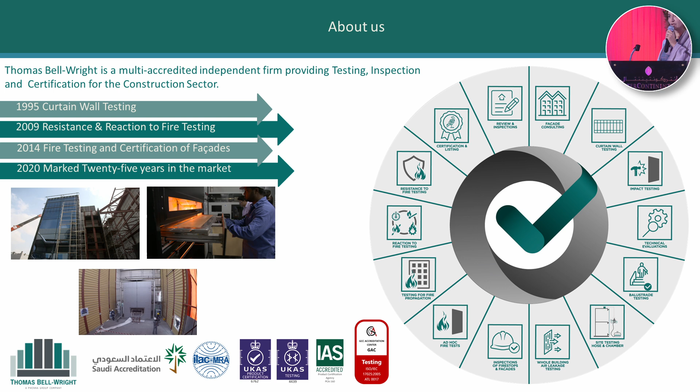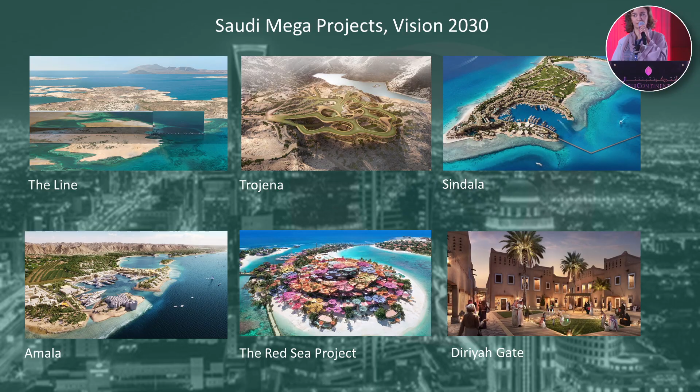As companies working in testing, inspection, and certification, we are required to have credentials to practice this work here in the Saudi market. So our laboratory is accredited by GAC here in the Kingdom of Saudi Arabia, and we are also accredited by the Saudi Accreditation Center for Inspection. Certification bodies are approved by SASO, and we have our approval as well for certifying materials.

We are now operating in very special and exciting times with the Saudi mega projects already starting and the construction boom to achieve the very ambitious vision of 2030. In order to prepare for this vision, the Kingdom of Saudi Arabia has taken many steps to establish strategies, regulations, and codes to achieve this.

If we have a background about codes and look up the oldest building code in the world, we will find that it was generated not far away from here in Iraq during the 18th century BC and the reign of Hammurabi. Hammurabi's reign was like an eye for an eye, al-ain bil-ain. I'm just going to read one line of the code for the audience.

If a builder builds a house for someone and does not construct it properly, and the house falls and kills its owner, then the builder shall be put to death. So basically what this says in very basic language is that the person who builds a house should be qualified to build it, and if it's not done properly, there should be accountability.

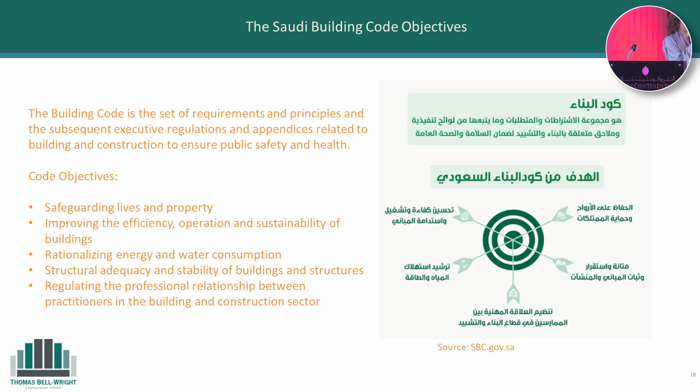The objectives of the code: the first objective is safeguarding lives and property, improving the efficiency, operation, and sustainability of buildings, rationalizing energy and water consumption, structural adequacy and stability of buildings and structures, and regulating the professional relationship between practitioners in the building and construction sector.

As we said earlier in the panel discussion, the code is quite large. It is comprehensive and spreads across many disciplines. It is hard for one person to be an expert in all these parts, and the consultant has to achieve many things at the same time.

So it's advisable to talk to the experts, to a fire and life safety consultant, to advise you on the best way to achieve everything related to energy consumption, green building code, and at the same time, apply the codes related to fire safety, which are 201 and 801.

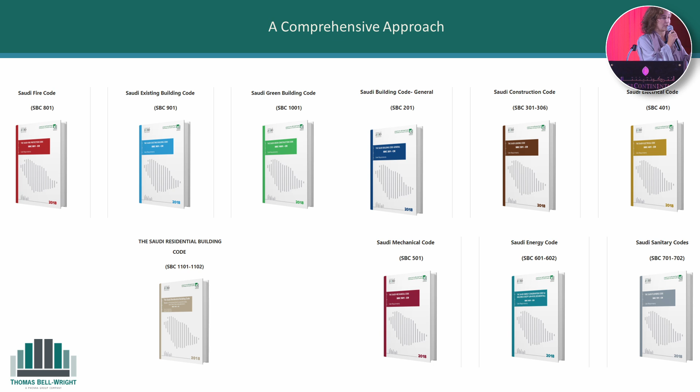After announcing the code to be the reference code for buildings, there was a 5-year implementation period. But still, during this period, from the beginning, fire safety and energy conservation were prioritized to be implemented regardless of this implementation plan. I'll just read in Arabic for reference to everybody.

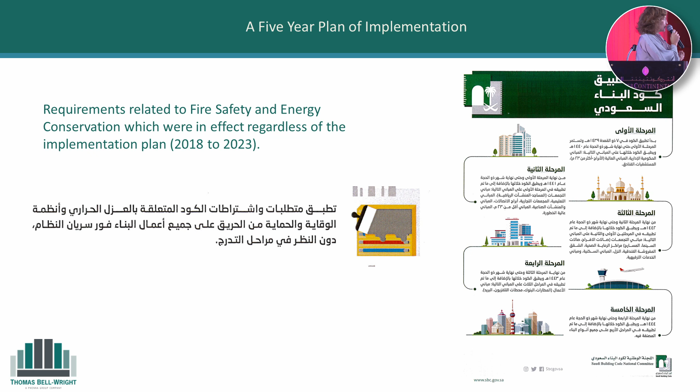This shows that fire safety and energy consumption are prioritized.

We had a bit of discussion earlier about the construction process: how the owner wants to build a project for a certain intent, maybe to sell it out or to keep it as his headquarters. He will go to a consultant and ask him to design the project as per the code. The consultant will then put together a set of documents, which are the specification and the tender package, and issue this project for tender.

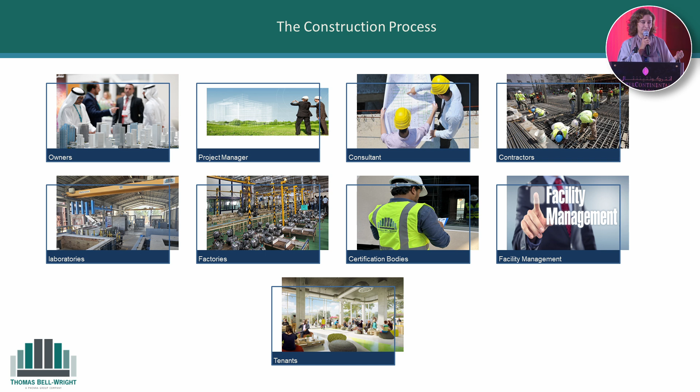A contractor comes and offers to build this project for a certain amount of money with the materials, assemblies, and structures that make the project, taking into consideration that all these materials should be sourced as compliant to the code.

Materials are fabricated in factories; they should be tested, they should be certified by a certification body, and then at the end we should deliver a project that is safe for the tenants and end users.

So this is the compliance path that I'm proposing for achieving this. The first thing is, during the design stage, is to have enough time to look at all the aspects of the building code and specify the right material from the beginning, because this will be the benchmark followed throughout the construction process by all the other stakeholders.

Testing and certification of materials that are the building blocks of this project should be established clearly in the specifications, and the requirements should be clear to safeguard the construction process and make sure these materials are compliant. During the material approval stage, the consultant should be diligent enough to look into the details of these materials, make sure they are the same as the construction project specification, and then inspect to ensure that what is installed is the same as what was approved.

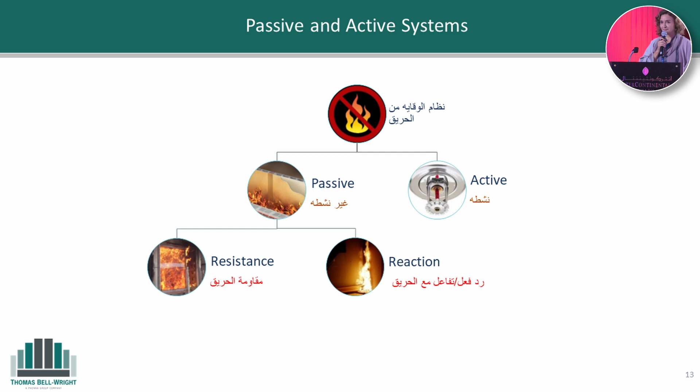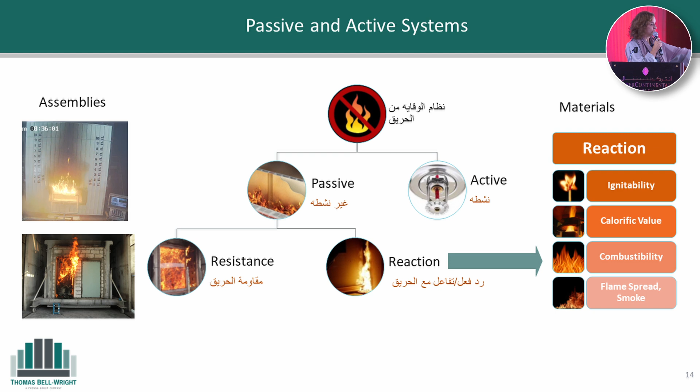In addition to this, you will have other requirements for assemblies, such as exterior walls, doors, or walls, as an assembly, for how they resist fire and reduce its spread. So this is the combination of requirements that should be in a project specification.

The requirements here in KSA are related to the Saudi Building Code, and there are other requirements related to SASO, the Saudi Standards Metrology and Quality Organization. These are technical regulations that cover many products traded in the market, and you are not allowed to trade these products without certain approvals from SASO. These are domestic products, toys, some electric products, and some construction products.

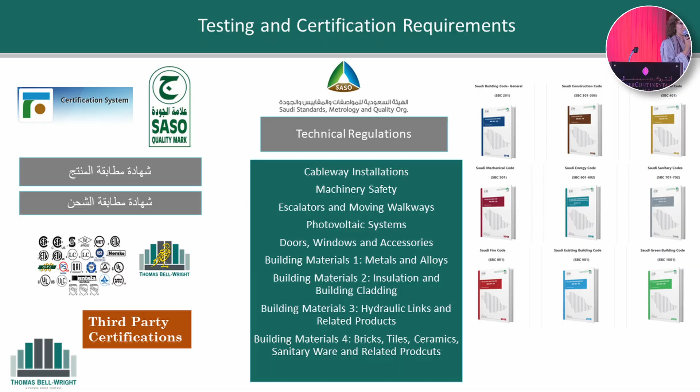According to the building code, there are requirements for certification, which I will explain later in the slides, and testing of building materials. Some of this is required to be tested and certified by SASO, and some are requested to be tested and certified by an approved agency, which is also approved by SASO as a requirement in KSA.

So these are some of the approved international third-party certification bodies, and this is one of the requirements of SASO. I will go through two types of materials to explain how we can comply by adapting both.

The first type of material is aluminum composite panels. These are the exterior panels that we use in cladding systems. They consist of layers: the outer layer is aluminum, the inner layer is aluminum, and there is a filler in between called the core. It is joined together with an adhesive.

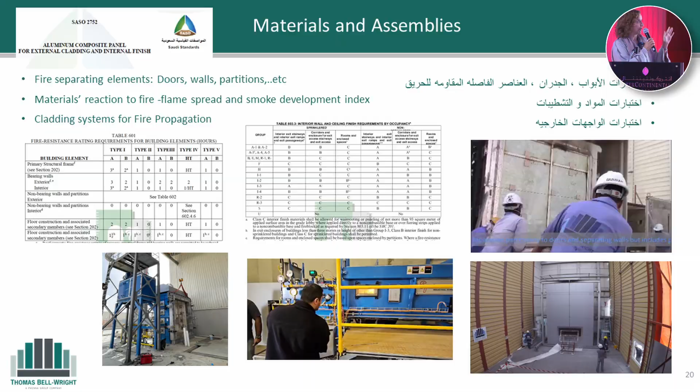According to the requirement of SASO 2752, these are the minimum requirements for these panels. There are physical requirements such as tensile strength, compressive strength, and other requirements. Related to fire, for example, is self-ignition limits on the core. There is also a very special way to classify this material according to SASO, which is FR1, FR2, and FR3. These particular classifications are relevant to the Kingdom of Saudi Arabia as per SASO requirement.

If you look at the table, some of it is in green, relating to ASTM, which is also a requirement of the Saudi Building Code, and the other ones relate to another standard called 13501-1, which is not a requirement of the Building Code but a SASO requirement. So sometimes the SASO requirement overlaps the code requirements, but has other tests as well for materials, and we should take this into consideration in the project specification.

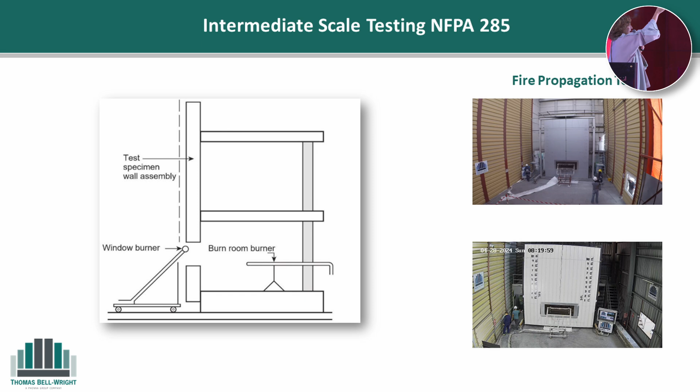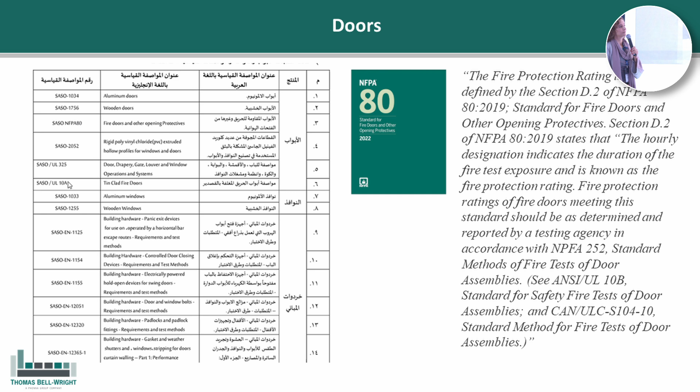In addition to using a panel and choosing a classification from SASO, we still have a risk related to the installation as a whole. Because if you have a cladding panel outside a building, you will still have a risk of fire going behind this panel and spreading behind the cladding system if you have not installed things like cavity barriers, or if you've used combustible insulation or other disciplines in the building that are combustible.

So in order to minimize this risk, here is one of the requirements of the code which references an assembly test, and that is NFPA 285. While the exterior face of the material can be tested separately, the code requirements for materials and assemblies also require tests of assemblies, not only the components and materials. This is a very important test. It can give confidence to the project team that the full design system meets the code requirement as a whole.

The test goes on for 30 minutes, and based on the height of the flame and the rise in temperature on sensors outside on the cladding and within the cavities of the system, you have a pass or a fail.

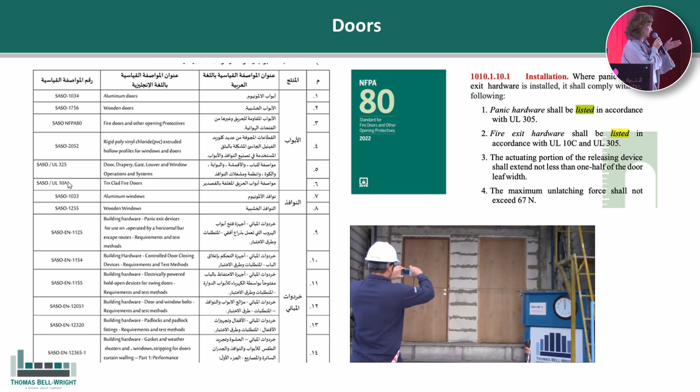If you look at the code requirement, this is not enough. There is a requirement for testing and also for listing. It shall be listed, if you notice highlighted in yellow, in accordance with UL 10C and UL 305.

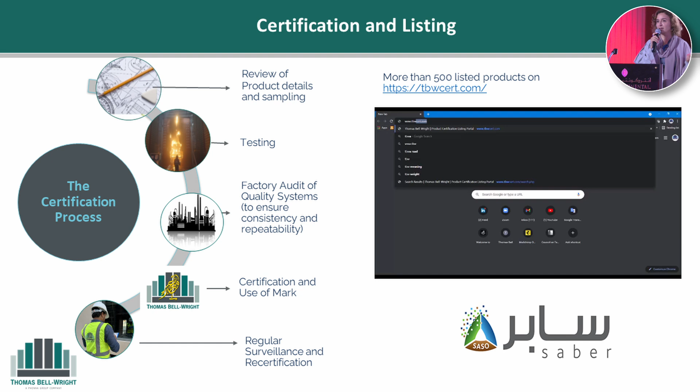So what does this mean? A manufacturer can bring a door for testing, but we will not be able to link this door to the factory or the manufacturing process. We do not know if the rest of these doors were fabricated in the same manner, and if I test the other doors, whether they will perform in the same way. So the requirements of listing and labeling relate to production at the factory, and they enable the manufacturer to be certified and then fabricate these doors in a consistent, repeatable manner to achieve always the same result through the certification process.

Which brings me to my third step of compliance. The certification process starts at the factory with the review of the product details. The certification body has to visit the factory, see the production line, pick a sample being fabricated, whether it's a panel or a door or any other system, take the product and test it. Based on the result of this test, you go back to the factory and make sure it has a quality system, producing all these systems in a consistent and repeatable manner. If you establish that, then you can allow them to use a certification mark.